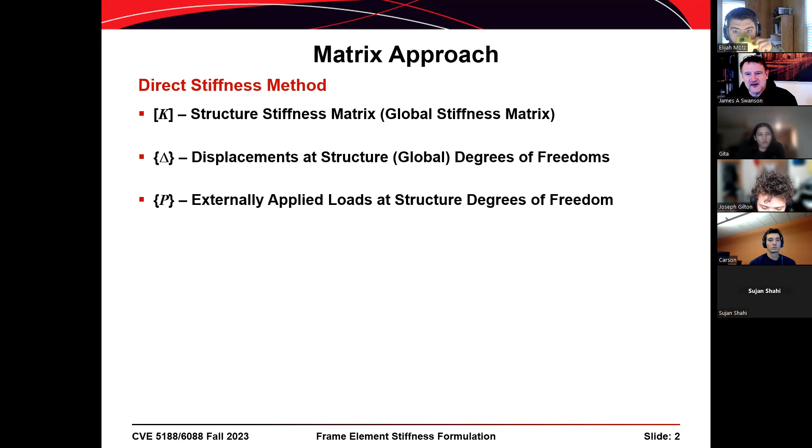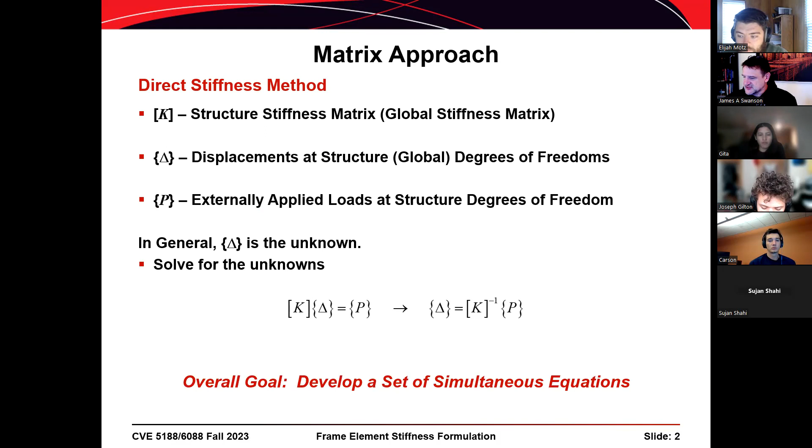We have displacements in the structure that correspond to the degrees of freedom we identify, and externally applied loads that we consider in the solution. The process is to solve for the unknown displacements — taking the stiffness matrix K times the unknown displacements delta, equal to P — and going through linear algebra to solve for delta. The overall goal is to develop a set of simultaneous equations that our computer can solve.

In previous lectures we addressed a truss element, the modeling of trusses. I haven't spoken much today — been working on other stuff, should warm up like a singer maybe. We first derived the stiffness matrix for the truss elements in our global coordinates, so the degrees of freedom at each end are parallel to our global X and global Y axes.

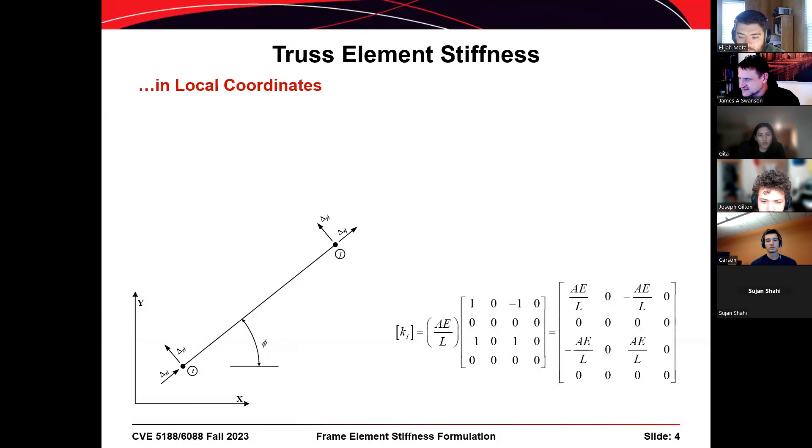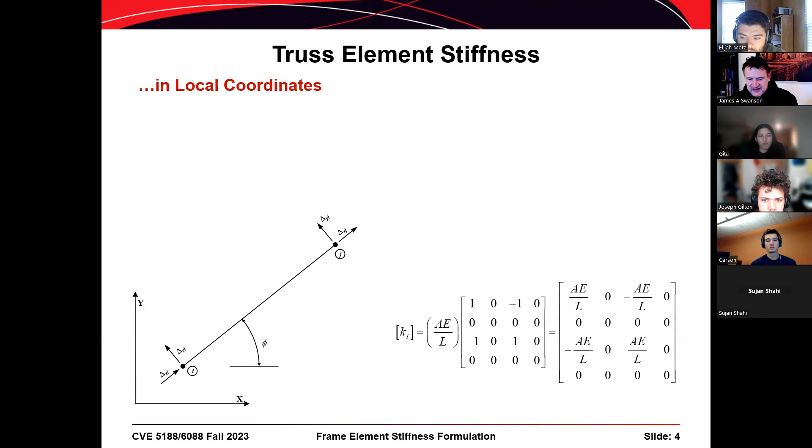In a later presentation, I think number 3, we derived the element stiffness matrix in our local coordinate system, then used pre- and post-multiplication to transform that local element stiffness into a global element stiffness before we assemble it.

In our fourth lecture on matrix analysis, we addressed beam elements with two degrees of freedom at each end — one translational, perpendicular to the axis of the member, and one rotational — so flexure and shear. We did that with elements aligned parallel to the global x-axis. But it works out these stiffness matrices are appropriate in both local or global coordinates, since our local coordinate system was aligned parallel to the global coordinate system.

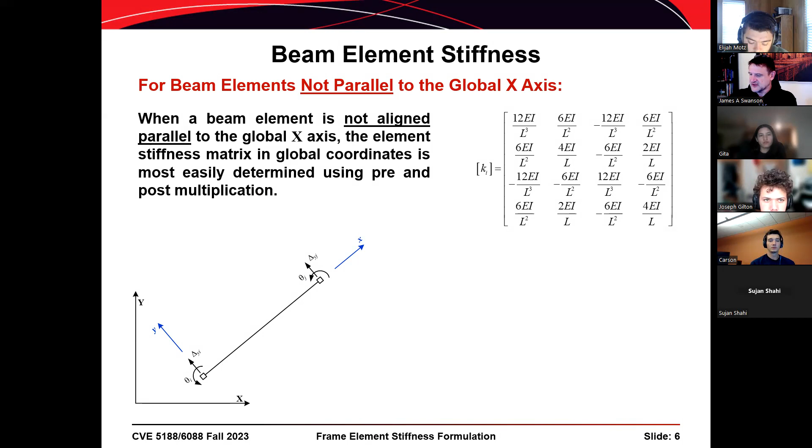Now we could rotate that if we wanted, looking at our beam element aligned at some angle relative to the x-axis, and then the stiffness matrix we were using for beam analysis becomes the stiffness in the beam's local coordinate system.

The process for deriving the beam stiffness in global coordinates would use the pre and post multiplication procedure that we use for trusses, but to this point it hasn't been necessary. So what we're going to do is take the lessons we learned in the context of the truss and the beam, and combine them together.

When we talked about this in the context of a frame, we end up with 3 degrees of freedom at each end of our element: 2 translational and 1 rotational. One translational in local coordinates corresponds to an axial force, the other to a shear force. And then you have the end moments represented by theta.

If we look at the 2 stiffness matrices, the one shown at the top is our stiffness matrix from the beam element, and the one at the bottom is from the truss element, both in local coordinate systems. Together they represent all 6 degrees of freedom. All we need to do is overlap or combine them so we have one element stiffness matrix that accommodates all 6 degrees of freedom.

I've identified those degrees of freedom shown here in blue. In some cases we have common degrees of freedom, such as delta sub y at the ith end and at the jth end. Luckily, in the truss element stiffness matrix, the columns and rows corresponding to those are all zeros. So when we add these two matrices together to get the frame stiffness, it works out to be a trivial operation.

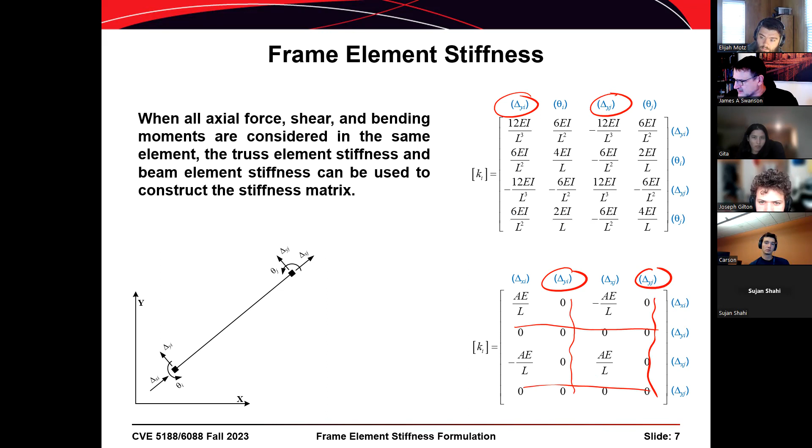When we do that, we end up with a 6x6 stiffness matrix that characterizes the behavior of a frame element in 2 dimensions. If we went to 3 dimensions, it would get a lot more complicated—each element would be 12 by 12, with 3 translational and 3 rotational degrees of freedom at each end of every member. We're not going to do that; looking at a 2-dimensional frame is sufficient to illustrate what we need for this class.

Remember, this class isn't a class on matrix analysis, even though you might think I don't know that. But we're doing enough matrix analysis to give you more insight into the inner operations of programs like Visual Analysis and SAP 2000. So this little exercise is basically what constitutes the discussion of a frame analysis.

After you have this element stiffness matrix in local coordinates, everything else in the analysis of a 2-dimensional frame is just a slight modification of operations we've already performed. When you did the second analysis homework, you used pre and post multiplication to develop a stiffness matrix for a truss. We're going to do that here too, since our stiffness matrix is given only in local coordinates.

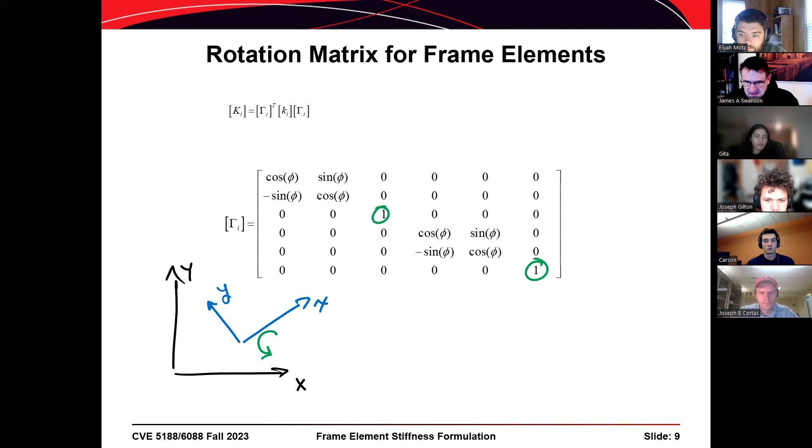So when we do our matrix assembly, the first step is to take our frame element stiffness matrix and then pre and post multiply by that transformation matrix gamma.

If we look at the element stiffness matrix without any releases, then that coefficient changes to 12EI over L cubed. So it's not just that one row and that one column that change, other coefficients within that matrix change as well. I should have done a better job pointing that out when we went through this lecture a few weeks ago, because that's a mistake that I made too when I was going through this the first time. I thought we just put zeros in and life is good and everybody gets the right answer, but no, it doesn't work that way.

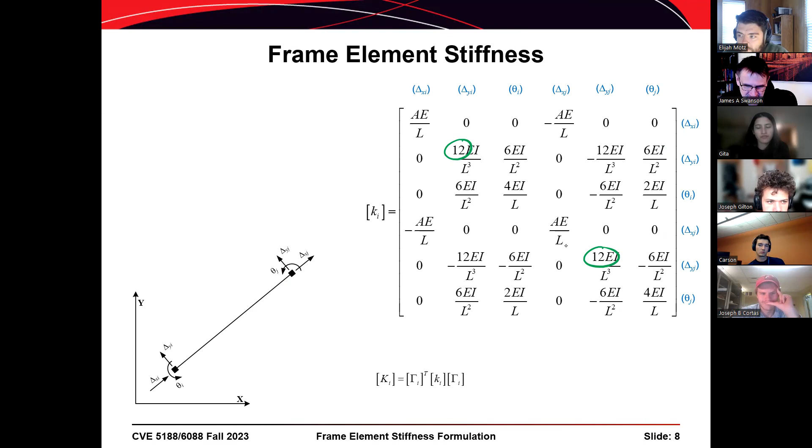So now that we have an element stiffness matrix for a frame element in 2 dimensions, we can go through and do an analysis.

And so what I'm going to do is take this problem here. I'll stop short of saying I'm going to solve it, but I'll go through the process that we would use to solve this problem. Now, I have a to-do list of things I'd like to improve on most of my classes, and this example is one of those. I'm not real fond of this example.

When I created this some years ago, I was teaching, I think, basic strength of materials at the same time. And so I was looking for something with a goofy load in an odd direction. And so I picked this problem and I thought, oh, it'll be great. It's in metric, SI units. And I suppose that's nice that we can solve a problem in metric, but I'm not particularly fond of this. But anyways, that being said, let's go ahead and move on.

So I'm going to give some shape to all the members. I'm going to use a W530 by 66. So that's 530 millimeters deep and 66 kilograms per meter, I think is the way that works. Our modulus of elasticity, assuming steel, is 200 gigapascals.

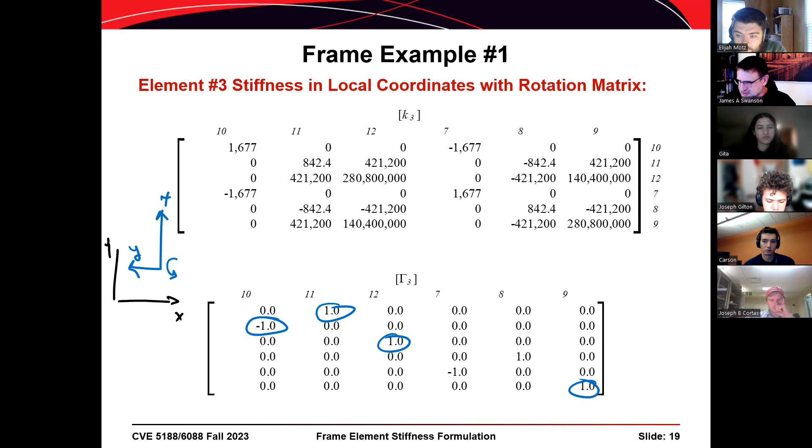Once you get through a number of these example problems, you can kind of look at the transformation matrix and see how the member is oriented just by the way those degrees of freedom are mapped between one coordinate system and the other. So we go through the pre and post multiplication process, and we end up with that.

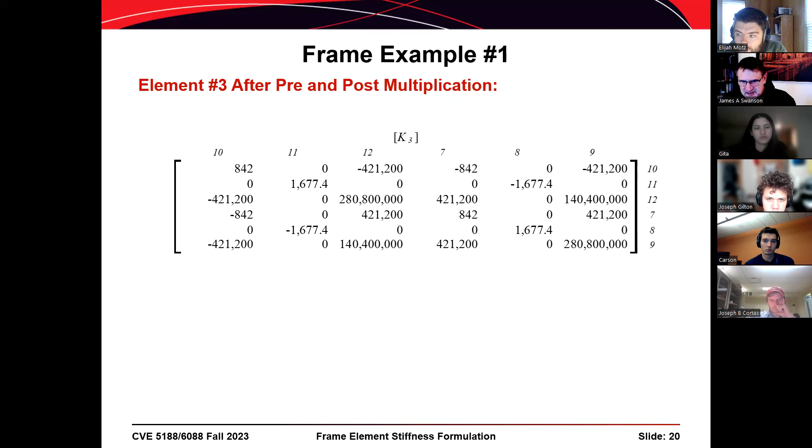So now we have a stiffness matrix for elements 1, 2, and 3, all in our global coordinate system. The next step would be to augment each of those, taking each from a 6 by 6 element stiffness matrix to a 12 by 12 global stiffness matrix, and then add them together.

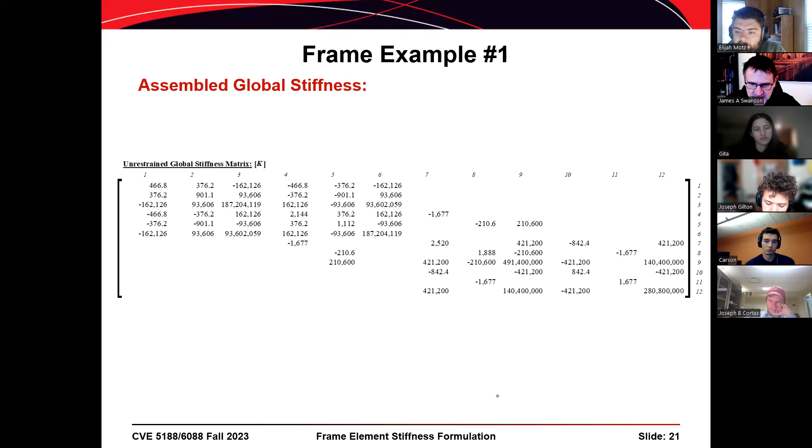So that we complete the assembly process, and we end up with our unrestrained global stiffness matrix. We have 12 degrees of freedom, so that's a 12 by 12 matrix. Now the next thing I'll do is go through the process of shaking out the loads, determining the loads. For this particular problem, I have two loads, and they're two different types. I have the loading on member number one.

That's a member load, so I'm going to need to develop equivalent end actions for that. And then I have the nodal load up there at joint D, so that force F is going to be a nodal load. I'm going to have one nodal load and one member load, one set of equivalent end actions. So let's go through that process.

If I go through and look at that, I can develop these member loads in local coordinates. So this is a new wrinkle. When we developed equivalent end actions in the past, they were always for beams, and we never had to transform the equivalent end actions from a local coordinate system to a global coordinate system. So this is a new step.

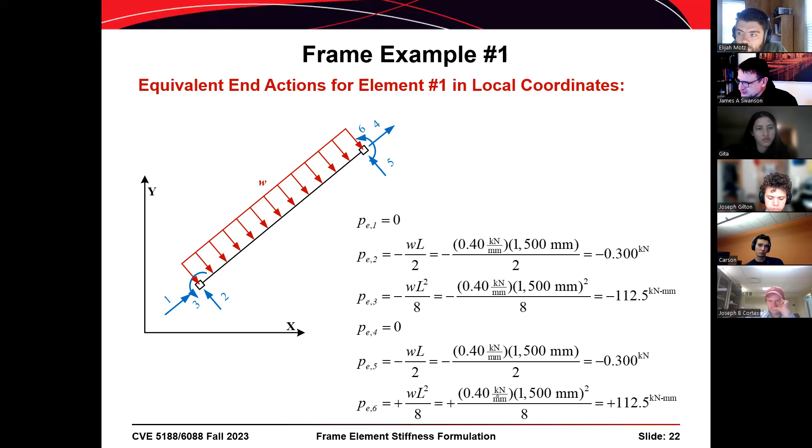What I'm going to do is develop the equivalent end actions for member number one in local coordinates. I can do that by recognizing that the axial force corresponding to degree of freedom 1 and degree of freedom 4 is going to be equal to 0. Then I can develop the end shears corresponding to degree of freedom 2 and 5, which is going to be equal to 0.3 kilonewtons.

But as an equivalent end action, that equivalent force actually acts in the opposite direction of what I'm showing as positive. So the equivalent end action, which I have drawn on a slide coming up, is actually acting in that direction. That green vector is equivalent to the red distributed load.

And then we have the equivalent end actions corresponding to the moments at the ends of the member. We have WL squared over 8, or 112.5 kilonewton millimeters. That equivalent end action goes like this at the left end and like that at the right end. So I end up with a negative value here, but a positive value there.

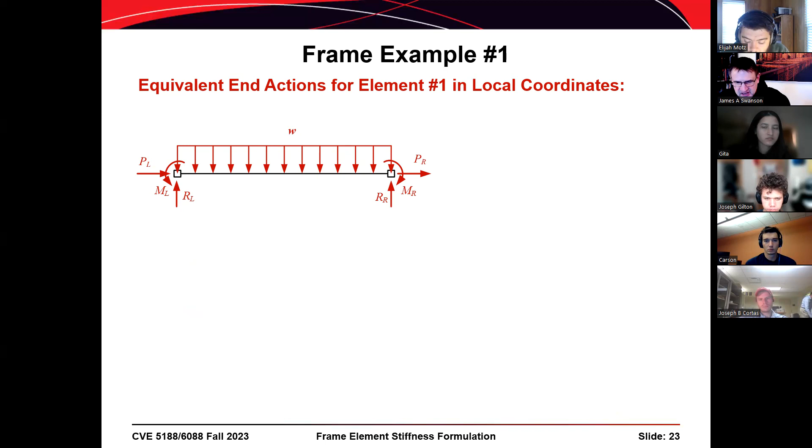Okay, now we can go through this—when I taught this the last time, I was using this to emphasize the equivalent end action process. So we can go through and look at this. That's a snip from the Purdue FE fixed end moments handout, and I like that particular handout a lot. So that's the way I do that.

And so what I'm showing here are the equivalent end actions. These are the fixed end actions shown here on this slide, and these are basically the reactions to the loading that's on that element.

Joe, you might want to tell Dr. Rosati that you're in class right now and that he shouldn't be disturbing you.

What we're going to develop from those fixed end actions are the equivalent end actions, and that's why I'm distinguishing here. Hopefully nobody's colorblind—sometimes I get a student who can't see green, and that's problematic. I was emphasizing the differences in the signs when I created this series of slides before.

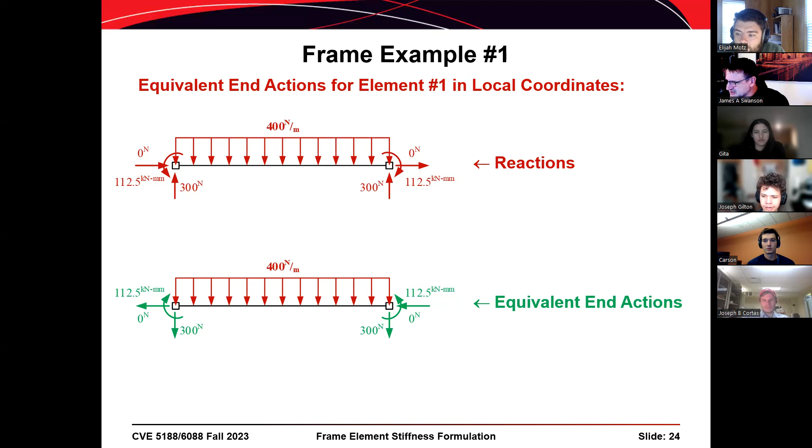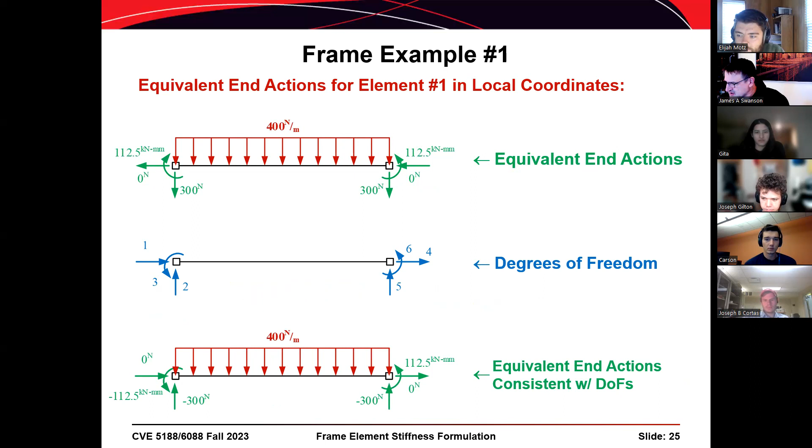So we take these equivalent end actions and develop from that the load matrix that's going to come from that. That's where the plus and minus signs come from. So we're going to take those values—those are the equivalent end actions that we have.

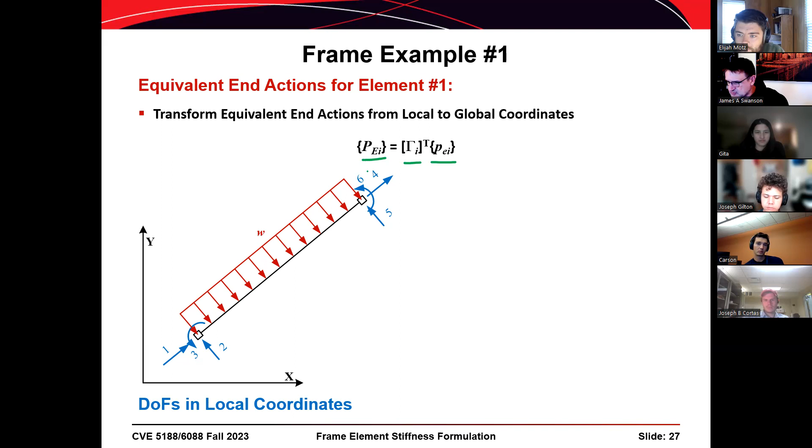We put them in the form of a matrix. We have our equivalent end actions in local coordinates here. We pre-multiply by the transpose of gamma, and we get the equivalent end actions in global coordinates. So we're basically transforming from one coordinate system to another.

And so what you can see is we have 0 axial force at degrees of freedom 1 and 4. But when we transform, that corresponds to some equivalent end action that is in the x direction.

We also have some portion of that shear that corresponds to local degrees of freedom 2 and 5, and they correspond to a load that acts in the y direction. And then that rotation just translates directly—it's a one-to-one translation there.

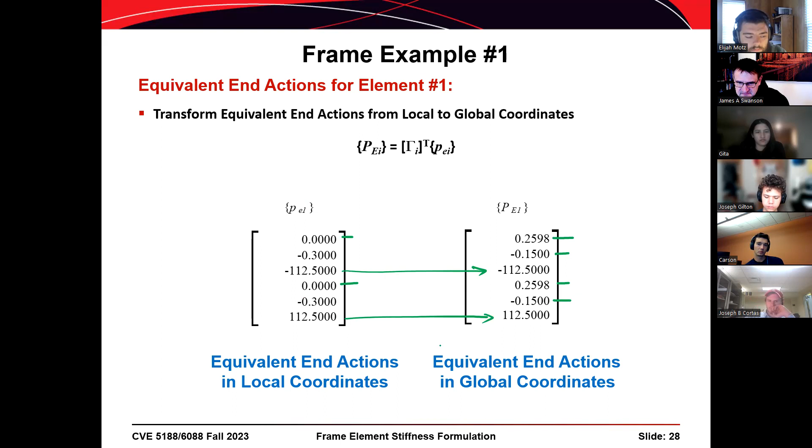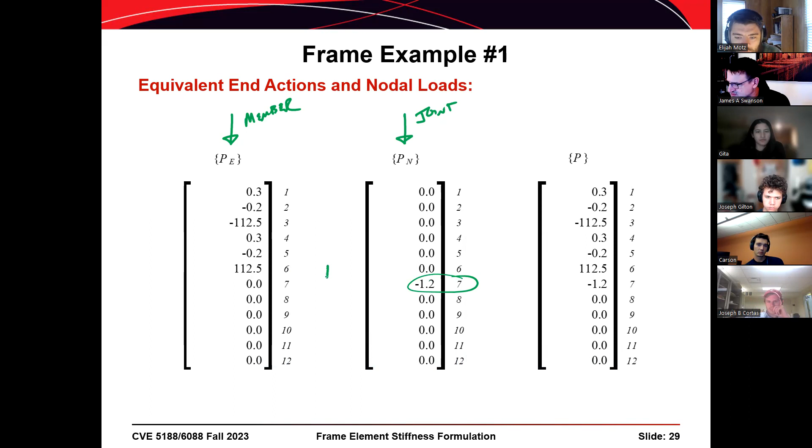So what I can do then is I have my member loads that are shown here. These are the member forces, and you can see that they act only on degrees of freedom 1 through 6. Here are my nodal loads or joint loads, and that acts only corresponding to degree of freedom number 7. So I add these two together to get my total load matrix P. And then I can start the process of reordering the degrees of freedom, subdividing or partitioning that matrix, and then going through the solution process.

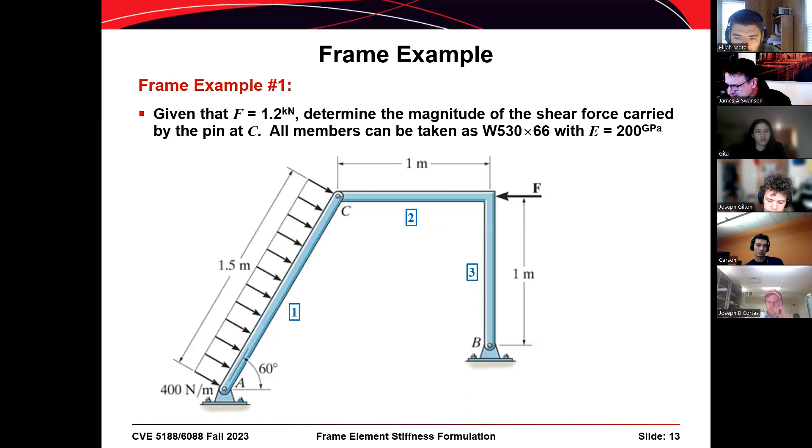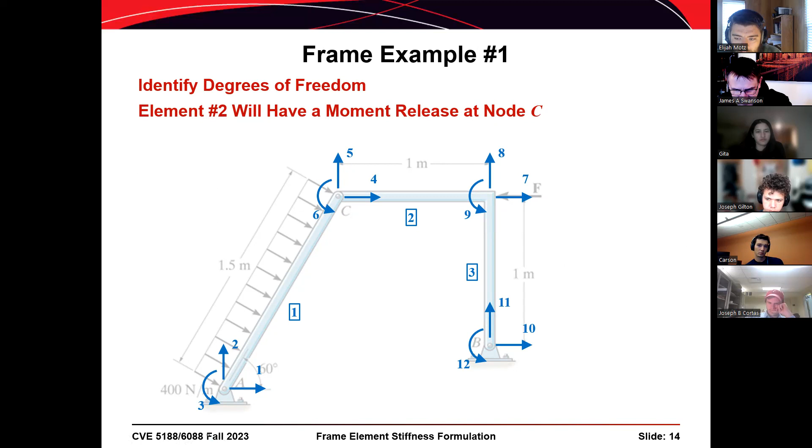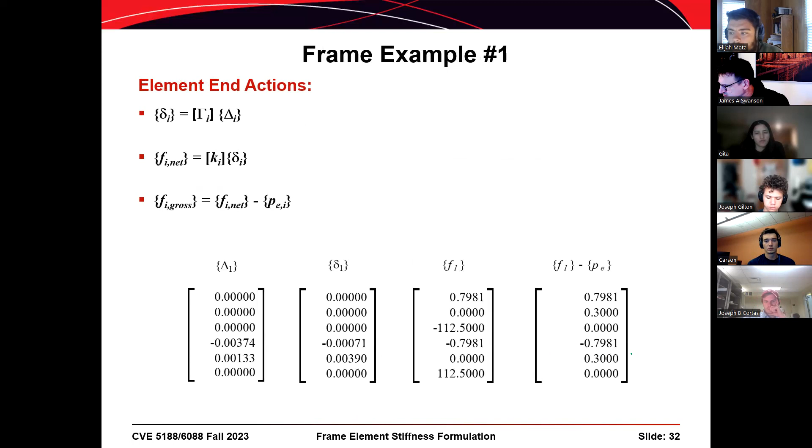We can develop the reaction forces that we have, both the net and then accommodating the equivalent end actions, to get the total reactions at the end. Then we can solve for our end actions and come up with our member end forces. With the end forces that come in from member number 1, we can solve for the pin force. So I have these values here, 0.7981 kilonewtons and 0.3 kilonewtons. I can take the square root of the sum of the squares and solve for that force that's in the pin.

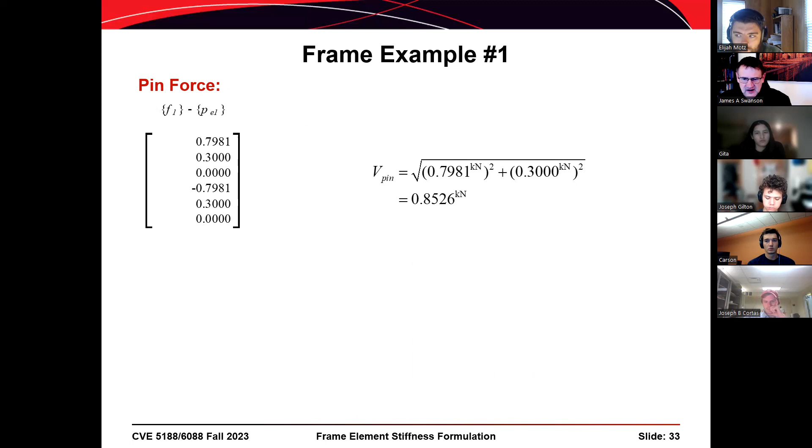All right, so with that, you guys should be positioned to where you can tackle the homework that corresponds to the matrix analysis. I've forgotten which homework assignment that is.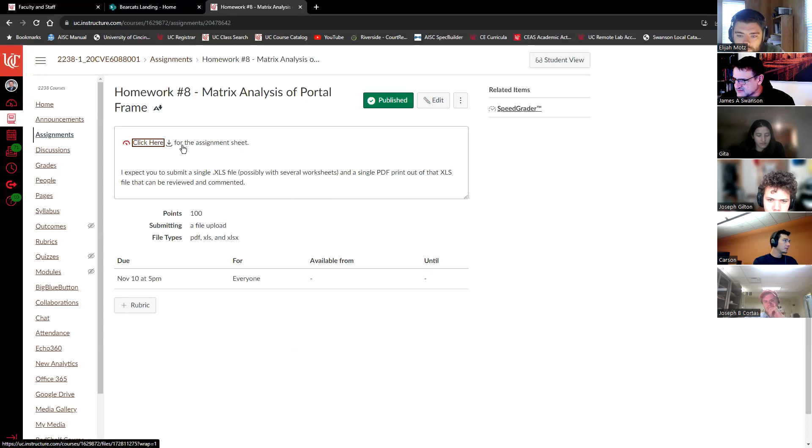All right, let's look at the assignments that we have here. So if we look, matrix analysis of a portal frame. Let's click here for the assignment and see what it is that we have. There we go—a 2-bay single story portal frame. So you have 1, 2, 3, 4, 5 elements, 6 nodes. So you're going to end up with an 18 by 18 stiffness matrix with degrees of freedom restrained.

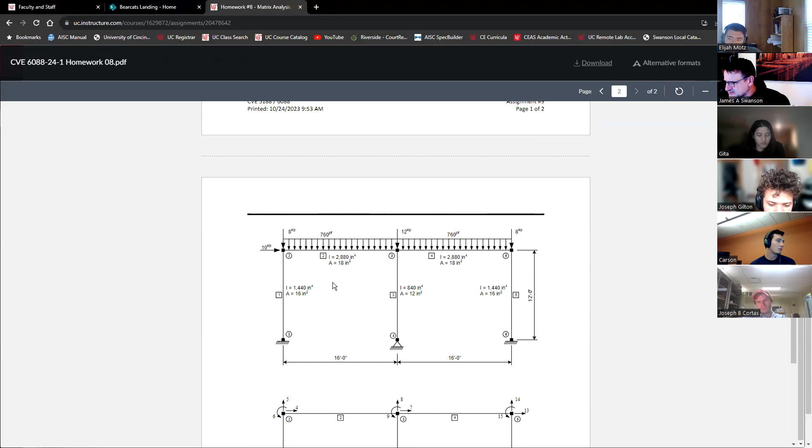If you go through and look at the degrees of freedom, then degrees of freedom 1, 2, and 3 are restrained. Degrees of freedom 10 and 11 are restrained. And degrees of freedom 16, 17, and 18 are restrained. You'll have to develop equivalent end actions for members 2 and 4. And then you have nodal loads at nodes 2, 3, and 5. It looks like with this particular situation, you won't have to do any pre or post multiplication with your equivalent end actions because the members that have member loads are all in the same coordinates, all parallel to the x-axis. So you don't have to do any pre or post multiplication on that.

All right, and then here's some: report the horizontal displacements at nodes 2, 3, and 5, report the maximum and minimum shear forces and bending moments for each member, and then sketch the shear force and bending moment diagrams for all the members as well. So have fun with that.

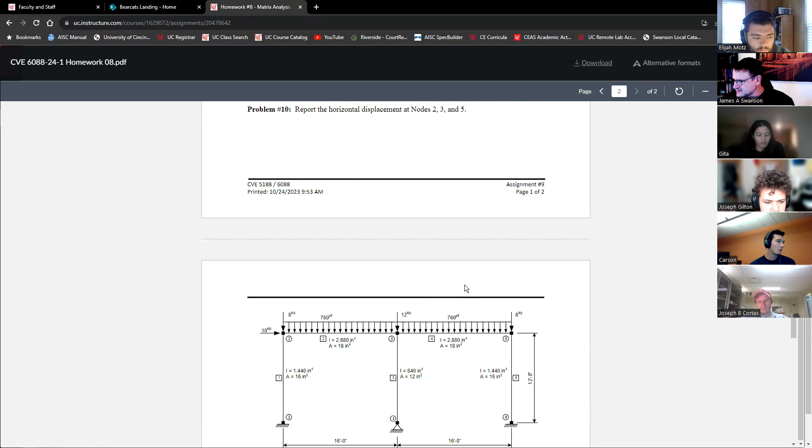I expect that if you guys work through the previous matrix analysis homeworks on your own, and did due diligence on that, this will probably take something on the order of 2 to 3 hours to complete. I doubt that you get it right the first time, but don't forget that you can model this in Visual Analysis and compare the results that you get from your matrix analysis to the Visual Analysis results, so you can check your answers. You don't have to guess as to whether everything is right or not.

All right, so with that, questions?

Yeah, that's this kind of thing where you don't know what questions you're going to have until you dig into the homework. All right, I'm glad I posted that, because like I mentioned in my steel design class yesterday, I'm not a really great judge of how much time something is going to take when I make a presentation.

If I'm doing it at a conference or something like that, then I'll rehearse and I'll know, but I don't rehearse these before class. I go through them, so I have a general idea what I'm going to cover, but I don't actually rehearse the presentation.

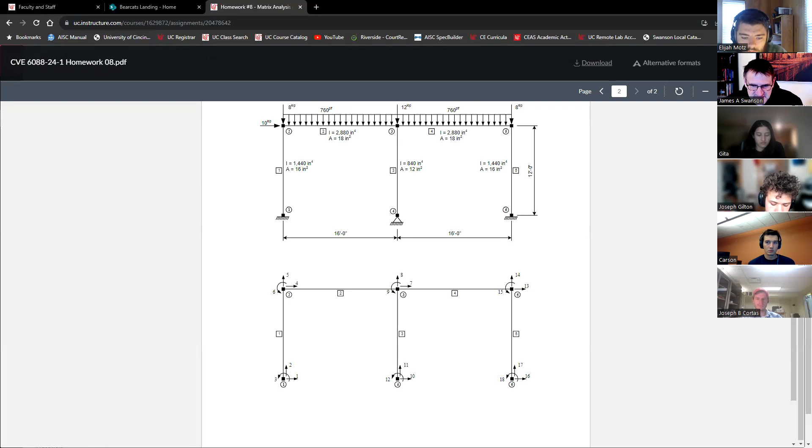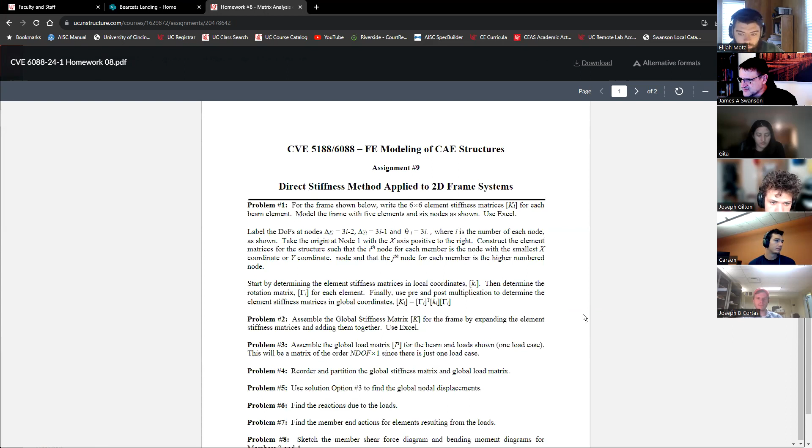All right, so our next step is going to be second order analysis. And if you go through and look at the assignments, assignment number 9 is actually going back and doing some second order analysis. So we don't know what a second order analysis is, but you will in a few minutes, right?

So let's go through some terminology. We've been doing a lot of analyses in this class, and you've done a lot of analyses by hand in CVE 3001 or the equivalent analysis class you took during your undergraduate work. The first order analysis is an analysis based on the undeformed geometry of the structure.

We all know that when you put a load on a beam or a portal frame, it's going to cause that frame or beam to displace, or deflect is a better word probably. We base the equilibrium conditions of our calculations, however, on the undeflected geometry.

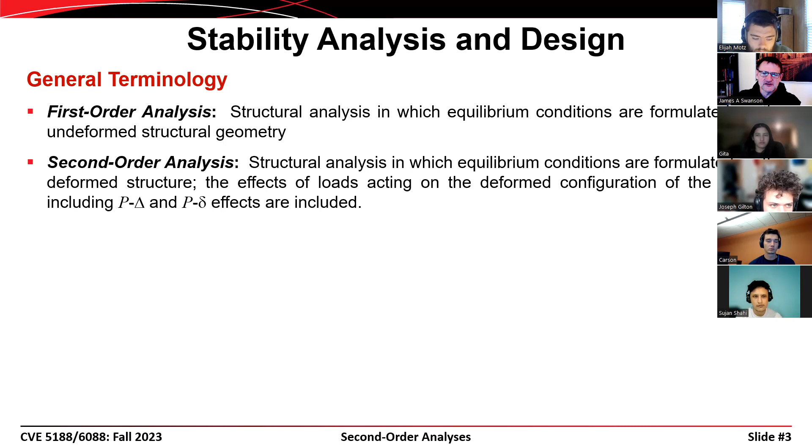A second order analysis, in contrast, is one where we base the equilibrium conditions on the deformed structure. So we calculate equilibrium at every one of the nodes based on the final position of those nodes. And that gives us a slightly different answer in a lot of cases than what we would get with a first order analysis.

Now the problem with this is that the amount of deformation is a function of the equilibrium conditions, but the equilibrium conditions are a function of the deformation. So you end up with a problem that is inherently iterative in nature.

The end result is dependent upon the parameters that go into it. So you have to iterate, or you have to come up with some kind of process in order to come to a final solution.

Now, when we look at the deformations, we account for them in two different ways. We have what is called a P-big-delta effect, and we have a P-little-delta effect. The P-big-delta effect is an effect of the loads that are acting on the displaced location of the nodes or joints within our structure.

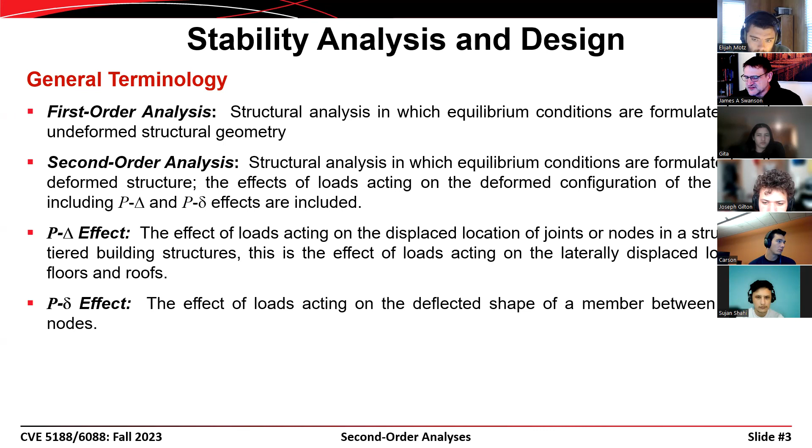A P-little-delta effect is related to the loads acting on the deflected shape of a member. So when you see P-big-delta, we're talking about nodal displacements within our structure. If you see P-little-delta, we're talking about member displacements — how much a member deflects in between its ends, as opposed to how much the ends of the member itself deflect. And then there's a more general term.

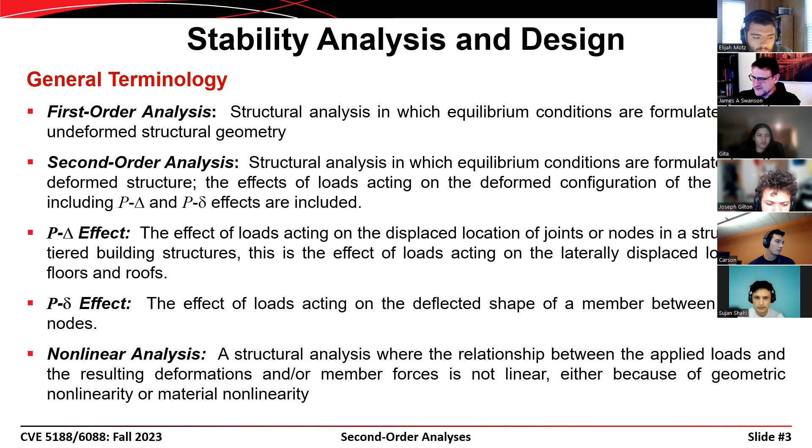A nonlinear analysis is more general than a second order analysis. Second order analysis just alludes to the idea that we're accounting for deformations of the structure. When we talk about a nonlinear analysis, it could be either deformations of the structure, or we could be talking about yielding of the material, or nonlinear material behavior included in there. So when you go in and do a second order nonlinear analysis, you're accounting for geometric deformations and the possibility of yielding or some type of failure of the material itself.

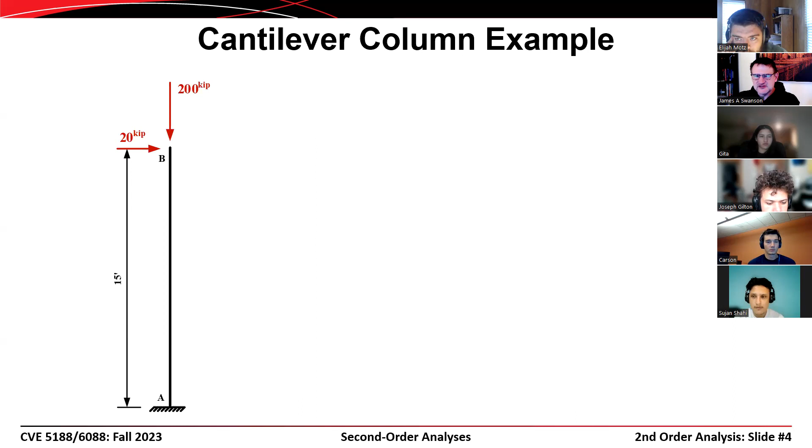So this is a classic example of a second order problem. This, or variations of this, are often used to illustrate what the problem is and how we account for it. So let's take a look at this. We have a cantilever column, fixed at the base at point A, free at the top at point B. We're going to apply a vertical force of 200 kips, and a lateral load of 20 kips.

So we can go through and do some rudimentary analysis of this. If we take the sum of the moments at point A, we end up with a base moment equal to 3,600 kip-inches. We can also predict what the displacement at the top of that column is going to be — it's going to displace to the right by an amount roughly equal to HL cubed divided by 3EI.

So you might be used to seeing the beam arranged horizontally. If you have a cantilever beam, it's PL cubed over 3EI. But in this case, that force is a horizontal force, so I'm calling it H instead of P. So we would expect a tip displacement of 1.342 inches.

And so when we look at the way that this thing deflects, that's what we would expect. Now, if we were doing a first order analysis, we would be done. We would design the member for a moment of 3,600 kip inches. We would expect a tip displacement of 1.3 inches. And we would walk away and be done. And that would be our first order analysis.

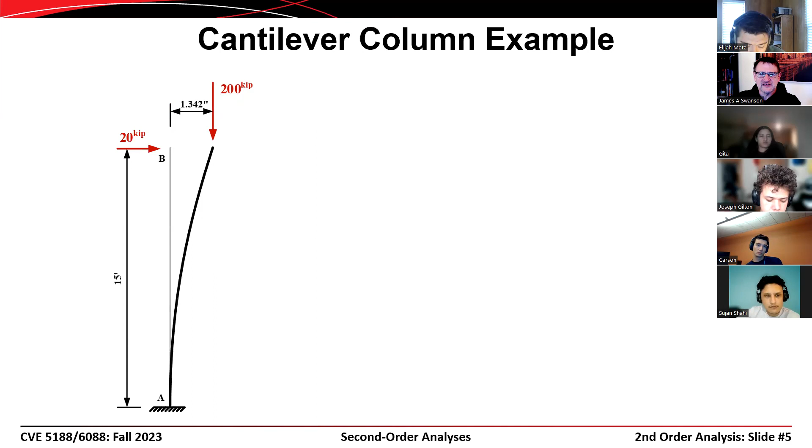However, if we're going to do a second order analysis, we recognize that tip B, the top of this member, has deflected to the right by 1.342 inches. So now, if we reconsider equilibrium of this column, the moment at the base is no longer just 3,600 kip inches. It's 3,600 kip inches plus that 200 kips acting eccentrically by an amount of 1.3 inches. So now the moment at the base of the column is 3,868 kip inches instead of 3,600 kip inches.

We could also reevaluate the tip displacement. Now, since we have additional moment in the member along the length of the member, we can expect it to deflect even further. So if you look at that equation, delta is equal to HL cubed over 3EI plus a moment ML squared over 2EI. That's not strictly correct, but it's close enough for the purposes of our example problem here.

And what you can see is that by having that load of 200 kips acting eccentrically, 1.342 inches, we get an increase in displacement at the top of 0.15 inches. So now the tip displacement goes from 1.342 to 1.492 inches. So that's not the end of the problem, though, right?

And because now we have an additional displacement at the top of the column, we have to reconsider equilibrium. And now the base moment goes from, let's see, 3,868 kip inches after our first iteration. Now, after our second iteration, we go to 3,898, and our tip displacement goes to 1.509 inches.

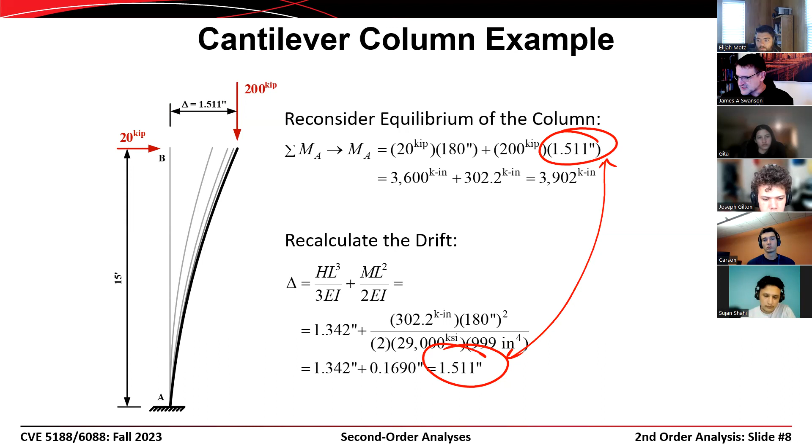All right, so we can go through and do hand calcs. I'm estimating that my first order analysis results in 3,600 kip inches, 1.3 inches of displacement. My second order analysis results in 3,900 kip inches, or 1.5 inches of displacement.

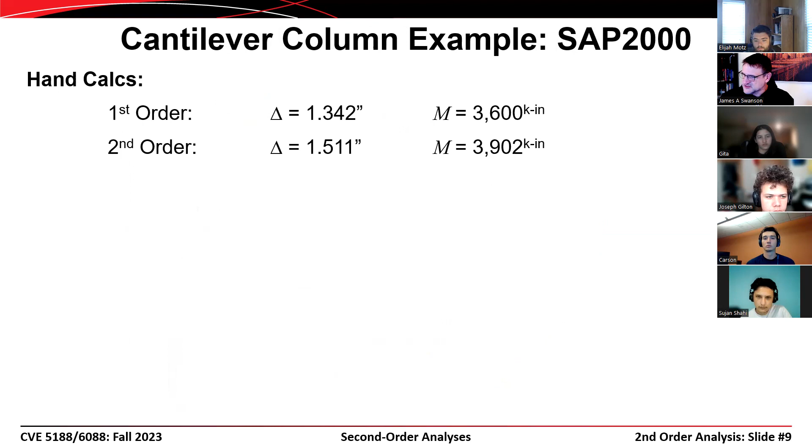If we go through and do this same exercise in SAP 2000, the results I get are slightly different, but comparable. The equation I was using to calculate the tip displacement wasn't exactly correct. The moment in the beam, due to the eccentrically applied load, isn't uniform over the entire length. It gets smaller at the top as the eccentricity decreases a little bit. But you can see the process when we do it with hand calculations is similar to what you'd get out of SAP 2000.

Now, oftentimes what we want is a quantity that indicates how important the second order analysis is. In some structures, if the structure is very stiff and isn't going to displace very much, then the second order effects aren't very large, and sometimes we don't even need to worry about them.

In other structures, however, structures that are more flexible, the second order effects can be problematic, and we certainly have to consider those. So the quantity we use is often found by taking the second order displacements divided by the first order displacements.

For this particular problem, if we take the second order displacement at the tip divided by the first order displacement at the tip, we end up with a value of 1.126 based on hand calculations, or 1.144 based on SAP2000 calculations. That value of delta second divided by delta first is a measure of how much the second order effects are contributing to the final solution.

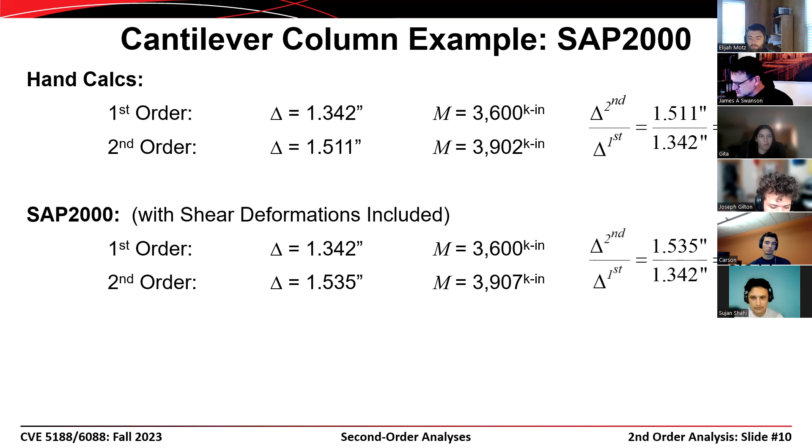You can look at this in a tabular format, where each row represents one iteration through that series of hand calculations. Here's the second order moment and the first order moment — 3600 is the first order moment in every case. That second order moment converges; I don't know if you'd call this the first iteration, maybe it's the zeroth, then second, third, fourth. This converges after about 3 or 4 iterations, so that's a nice stable problem.

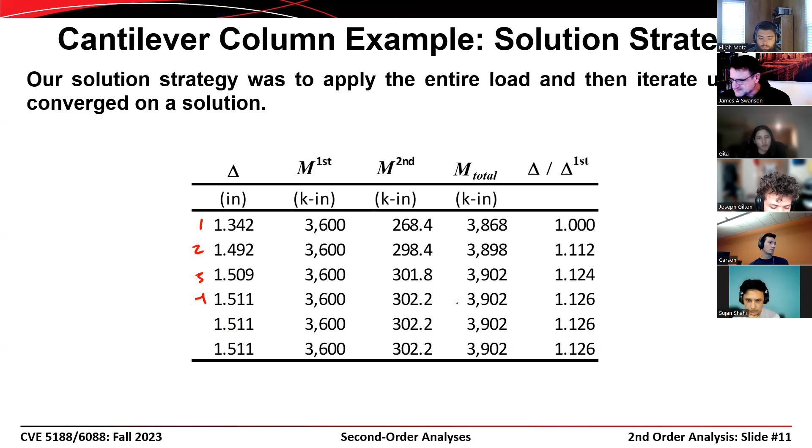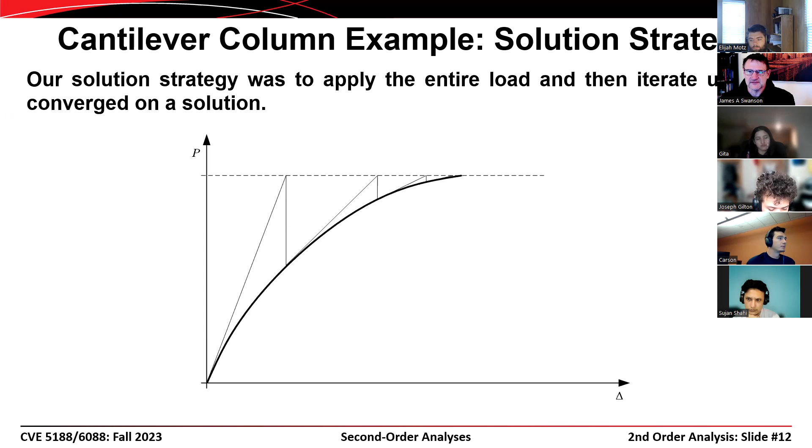So one solution strategy is to apply the load incrementally. Instead of applying the entirety of the 200 kip vertical force and the 20 kip horizontal force all at once, maybe we apply a little bit at a time.

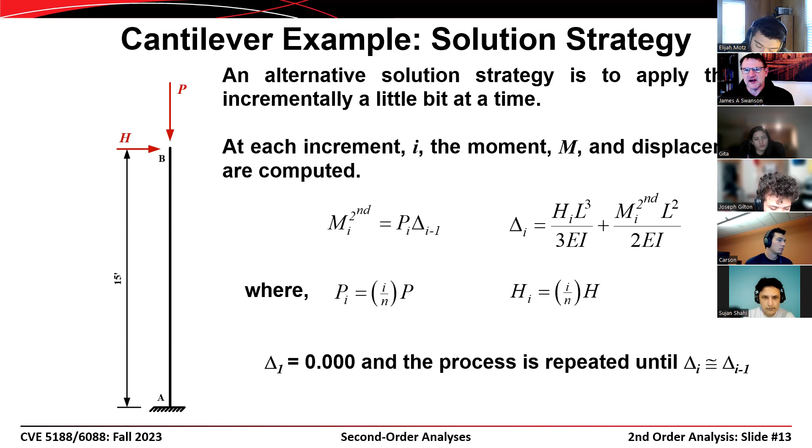Maybe we break that up into 10 increments. So we apply 20 kips vertically and 2 kips horizontally in each increment, and we can track the solution as we go along. We can break the increment size down into smaller and smaller increments until the solution from two successive analyses converges with each other. I'll show that here.

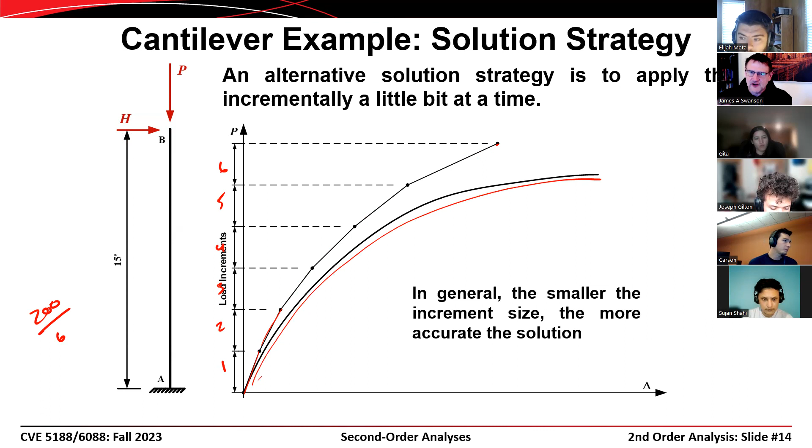So what you do is you go in and make that increment size smaller and smaller. You break it up into a larger and larger number of increments until you get a convergence in the response of the structure between two different increments.

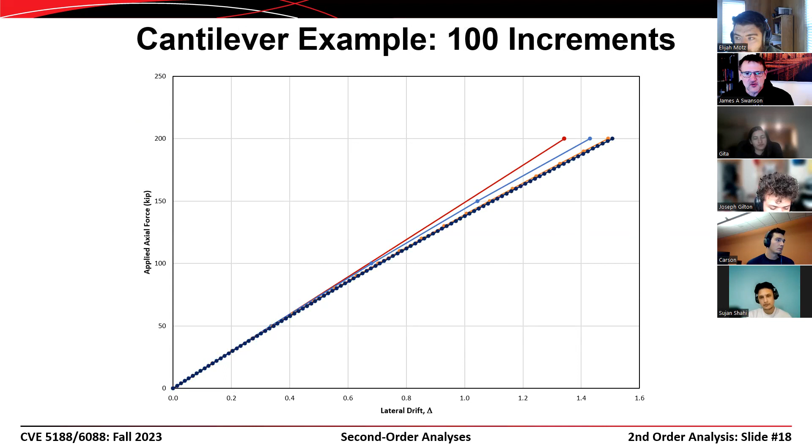What you can see is that as I increase the number of increments used in the solution, the responses tend to converge. So you could say that most people would agree the yellow line is close enough to the true solution for design purposes. You could say this is converged at 10 increments, but it's kind of ridiculous because you had to solve the 100 increment problem in order to know that the 10 increment problem was satisfactory, right?

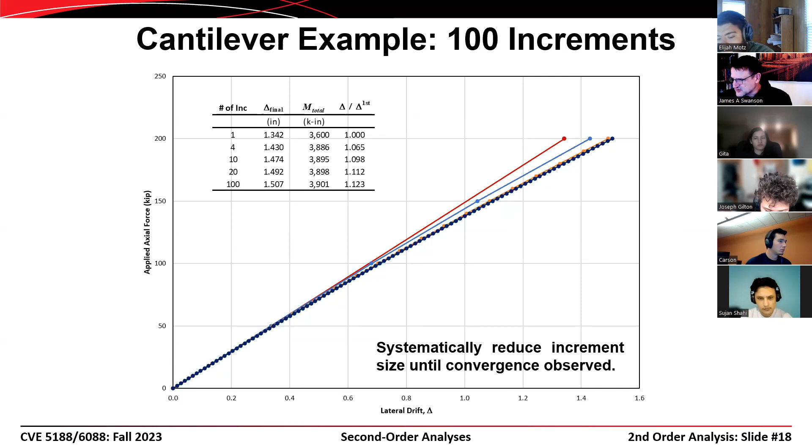Now if we look at the math behind that, it looks like this. The delta divided by delta first ends up being 1 in the first case, 1.065 in the second case, 1.098 with 10 increments, et cetera. If we go through and look at the numbers behind that process, here they are in case you wanted to try and replicate that.

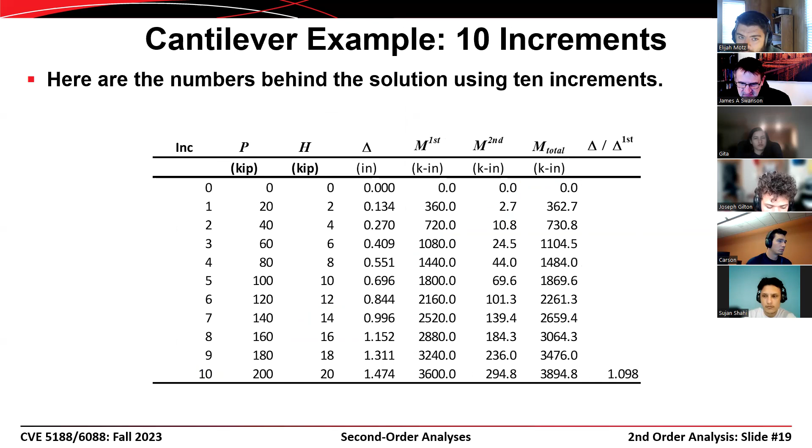Now in that last exercise, I was going through using a variable number of increments, but I was always using just one iteration at every load increment. I would apply, say, 20 kips vertically and 2 kips horizontally, and then I would just go through that series of calculations one time. I wouldn't iterate until I converged at every increment.

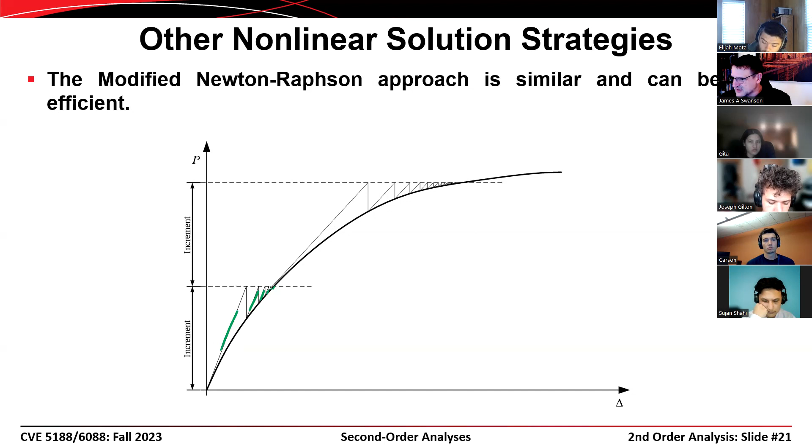Then with the second increment, we calculate a new stiffness, and each one of these lines has the same slope. So here we've gone from four iterations in the second increment for the full Newton-Raphson, to as many as ten iterations in the second increment for the modified Newton-Raphson.

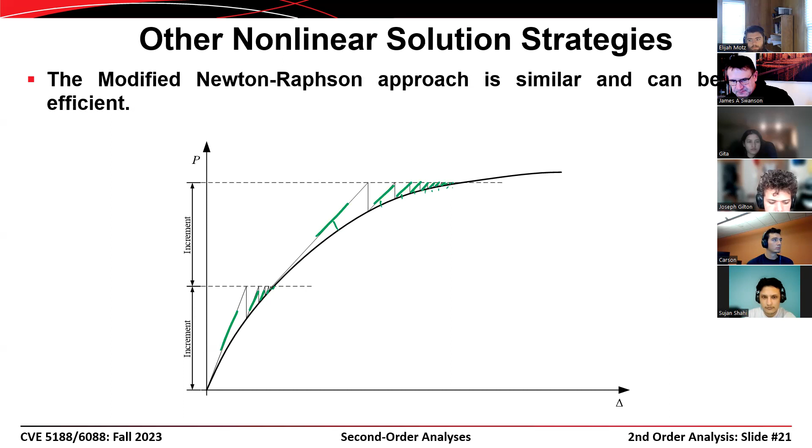All right, now let's introduce another concept. We're going to go back and look at that problem again, except now instead of looking at a single member, I'm going to look at a portal frame. This portal frame is conceived conspicuously so that one member is resisting all of the horizontal force. So we have our original member AB, but now I'm going to add a second column, column CD. Column AB is fixed at its base, but column CD is pinned at the base.

So if we go through and do an analysis of this, we're going to refer to column AB as the stability column, or the side sway column, because it's the only column in this frame that's resisting the horizontal force H. We're going to refer to column CD on the right as a gravity column, and the reason why is because the only thing that it's doing is resisting the gravity load Q that's applied to it.

So when we looked at the Tower of Terror, we broke down the framing. Some of the columns were participating in the lateral force systems, some were not. The columns that were participating in either the moment frames or the brace frames are referred to as stability columns. The other columns are there just to resist gravity loads, so they're called gravity columns.

All right, so with that, let's go ahead and look at what happens when we apply a load to this. We end up with member AB resisting all of the horizontal force H. It's carrying all of the gravity load P, and then member CD is carrying all of the gravity load Q. Or at least that's what it looks like. What happens if we break this apart and look at equilibrium internally?

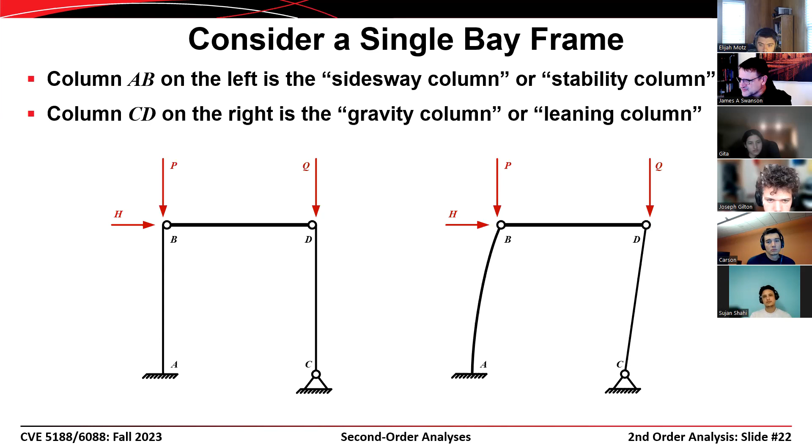Let's take a free body diagram of that gravity column, member CD. If we look at just that column, what we find is that in order for it to be in equilibrium, it has to have some horizontal force coming through that strut, BD, at the top. If there wasn't that F sub H, that internal horizontal force in that member, column CD would just fall over to the right, right? It would be unstable.

So now if we take a look at the moment at the base, we could say that force, F sub H, has to be equal to Q times the horizontal displacement delta divided by the length of that column.

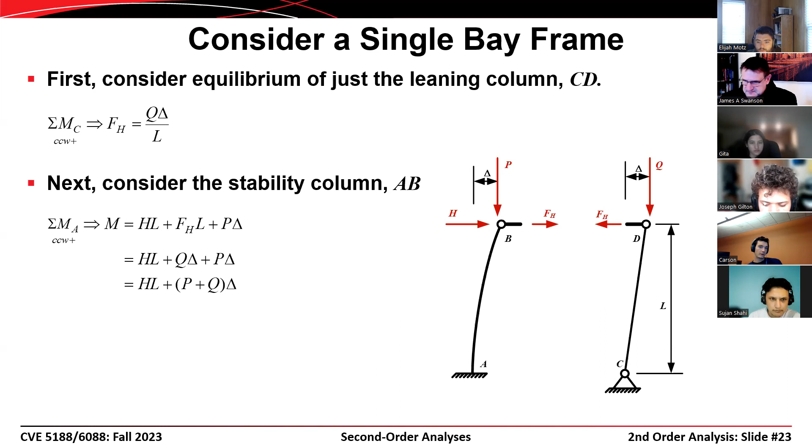Now when we introduce equilibrium of the stability column, column AB, we have to represent that force acting with an equal magnitude, but in an opposite direction. So it works out that now if we consider equilibrium of the base of the stability column AB, it sees second order effects not only from the load that's applied directly to it, load P, but it also sees second order effects from the loads applied to the gravity column. It also sees second order effects resulting from the load Q acting eccentrically through that horizontal displacement delta. And so because of this, column CD relies on column AB for its stability.

So what we say is that column CD is a gravity column and it's leaning on the stability column, column AB, and so we refer to that column as a leaning column. Let me read this out loud so I get it right: note that the moment at A that the column would experience is the same as if it were carrying its own load plus the load that the leaning column is carrying.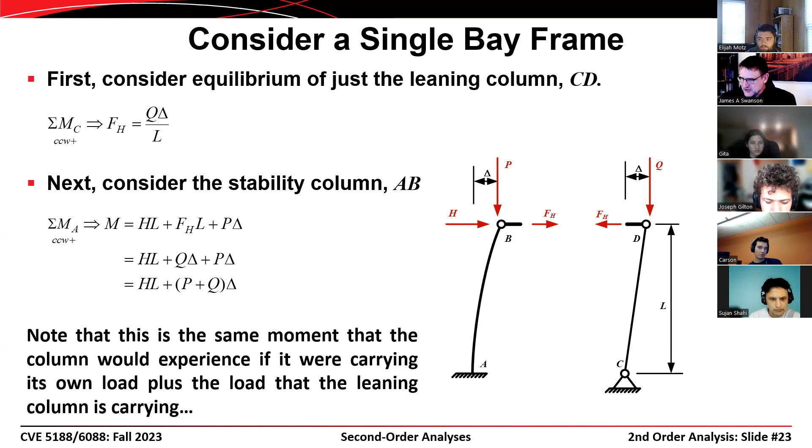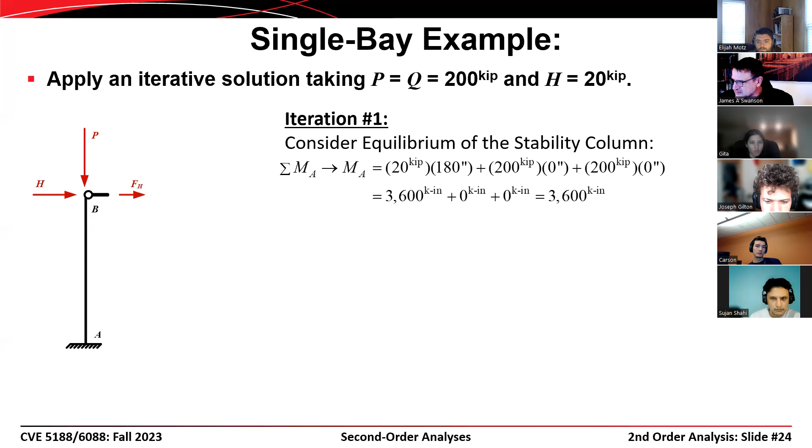Now, if we go through and do our equilibrium iterations on this, we include that force F sub H. Through our first iteration, we would get 3,600 kip-inches, and we would get a displacement of 1.342 inches.

We can go through a second iteration, and we could calculate the moment at the base, including the horizontal force F sub H. Now look at the moment at the base of the column - we're already up well beyond what we had converged to in the absence of the leaning column. We had 3,900 kip-inches, now we're already at 4,100 kip-inches. And we end up with a tip displacement, or story drift, of 1.592 inches. We could go through this process and iterate until we converge.

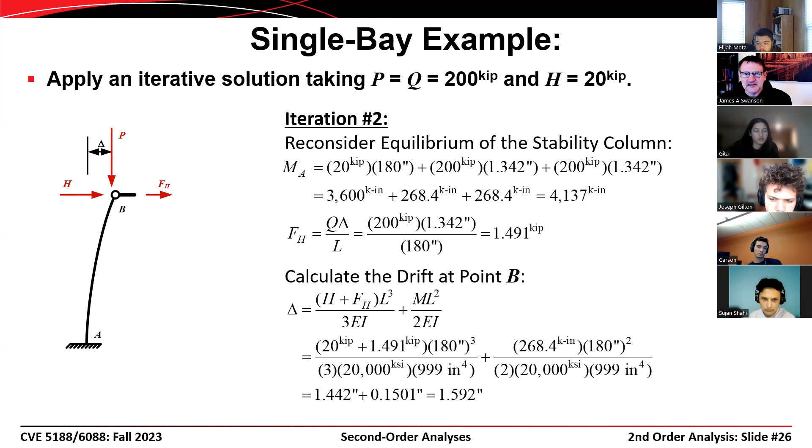What you would find is that we end up with a ratio of delta second over delta first that is far larger than what we got for just the stability column by itself. That number was 1.12 when we looked at just the stability column alone, but by including the gravity framing in our second order analysis, we see that the gravity framing contributes significantly to the second order effects in our problem.

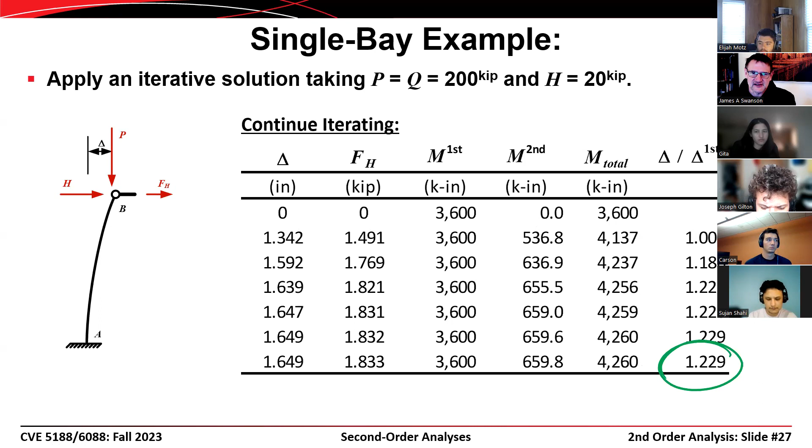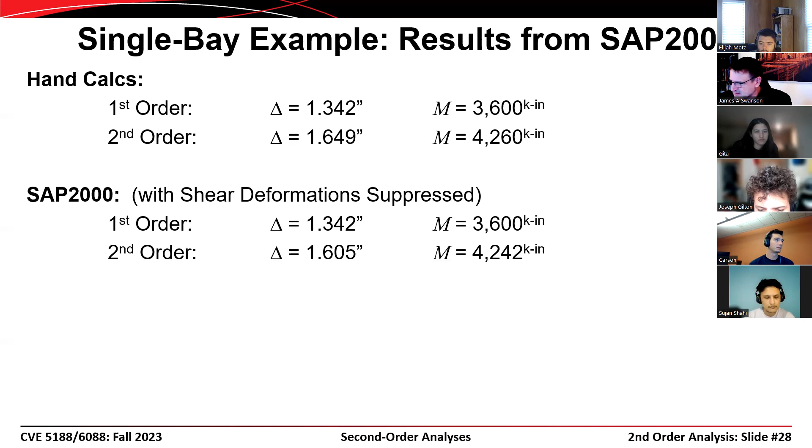So when we go through and look at the single bay example and compare our hand calcs with the results from SAP 2000, you can see that we get similar results there, if we include shear deformations - this must be with shear deformations included. I must have a typo there. I thought I had this as a clean presentation, but I guess I do not.

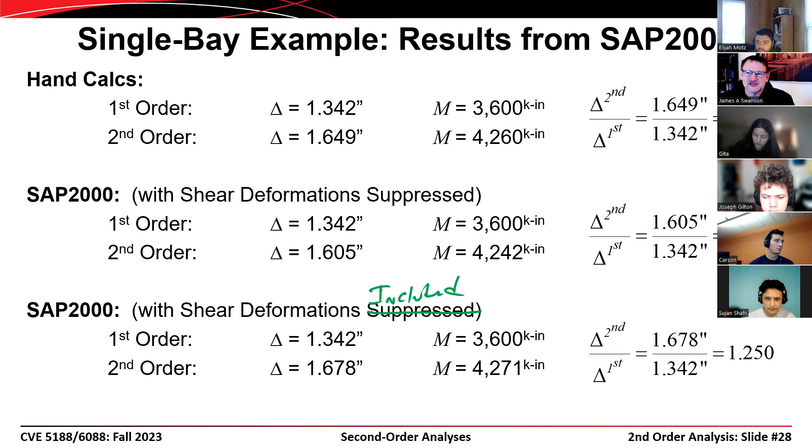You can see that our ratio of delta second over delta first gets pretty large. So we're up in the order of a 25% increase in displacements, and correspondingly a 25% increase in member actions based on our second order results.

So what do we take away from this so far? Well, the first order results with and without leaners, the second order results with and without leaners - second order effects can be important. In this case, they add about 20% to the drifts and the moments from our lateral framing. And the leaning columns are important. The leaning columns don't affect our first order results at all.

When you guys were working on homework number 7 due tomorrow, you didn't have to include the gravity framing in order to get the results of your member forces for the brace frames and the moment frames. If you're going to do a second order analysis, however, you do have to include those leaning columns. You have to include all of the gravity framing in the structure in one form or another.

And in fact, if you go back and look at the Tower of Terror handout and look through the load calculations, I have an artificial column line, an ACL, if you will, and I have some leaning column loads that are included in that. Until now, you probably didn't know what they were for, and now you know that we need to include them.

So this is probably a good time to wrap up. We're near the end of our hour, and this is a convenient place in this presentation to stop.